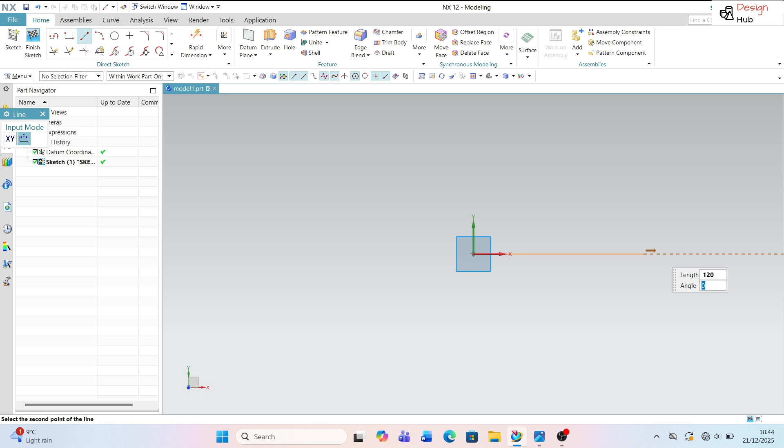The height is 20 mm. Again going with the line command.

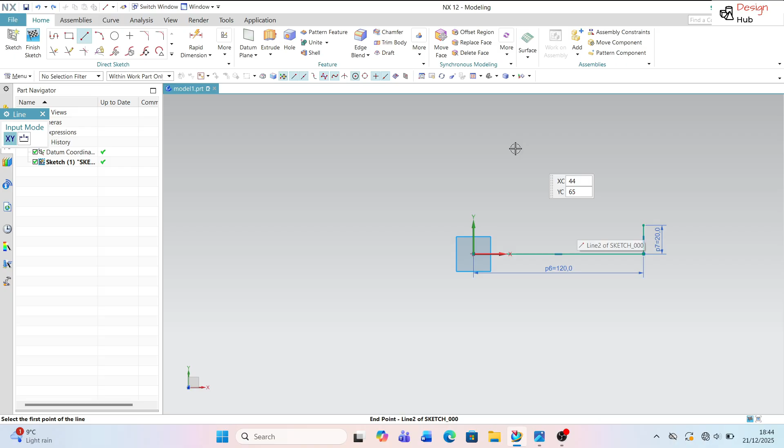This distance is 30 because 120 minus 60, so both sides are 30 mm. So again the 30 mm length, and angle is 180 because 180, since there is a minus side.

Now again the line command, and the distance is 25. This is the remaining, because total is 45 minus 20, so there is a 25 length.

And there's another line. It's 5 mm, you can see nearby the V slot.

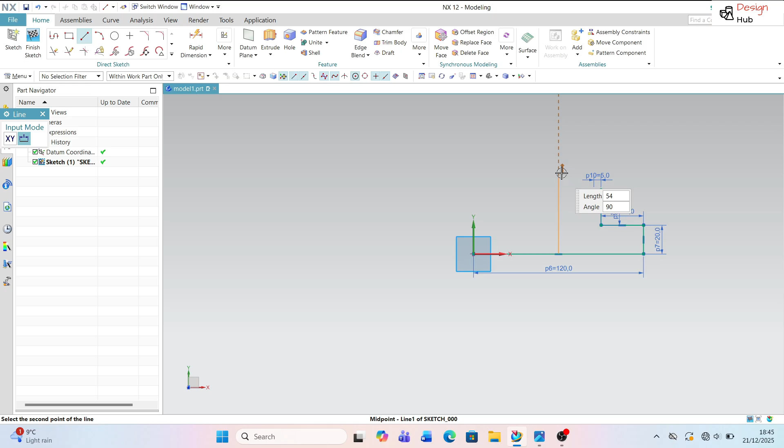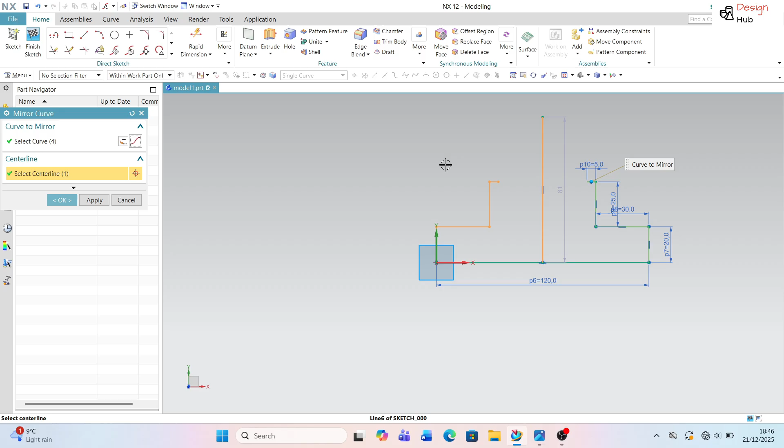Now we are going to mirror the sketch. First of all, sketch the line or the center line, and now we are going to choose the mirror curve. Select the line, select the center line. You can see the result.

Now we are going to make a V slot.

So create the center line and simply select the line, and we connected two lines. You can see on the 45 degree.

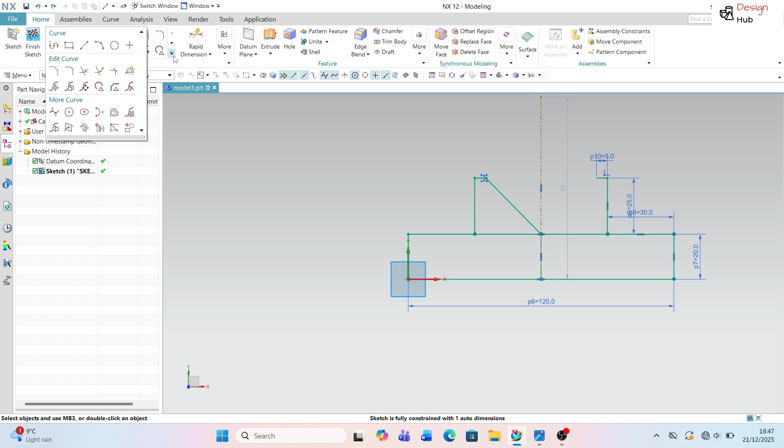Now again we are going to choose mirror curve, select the line and select the center line.

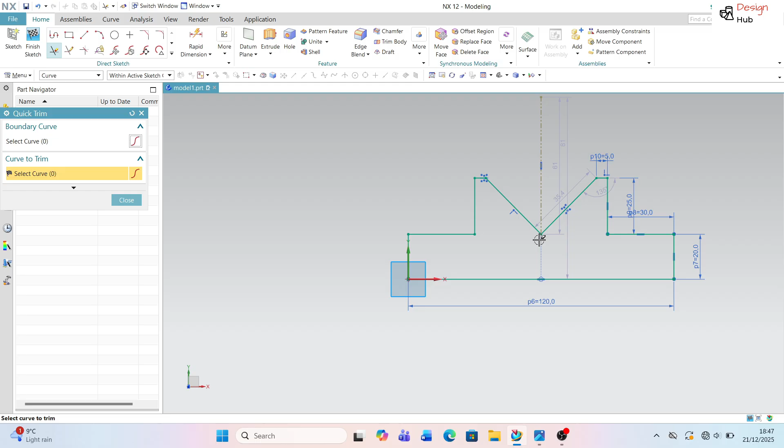You can see the V slot is ready, and now trim command to cut unwanted lines. You can see our sketch is ready for extrude.

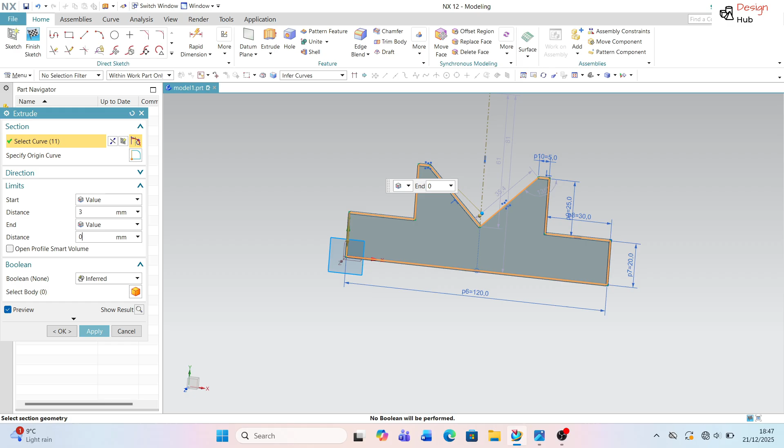Now you can see the width is 45. So now choose extrude command. The width is 45, and apply.

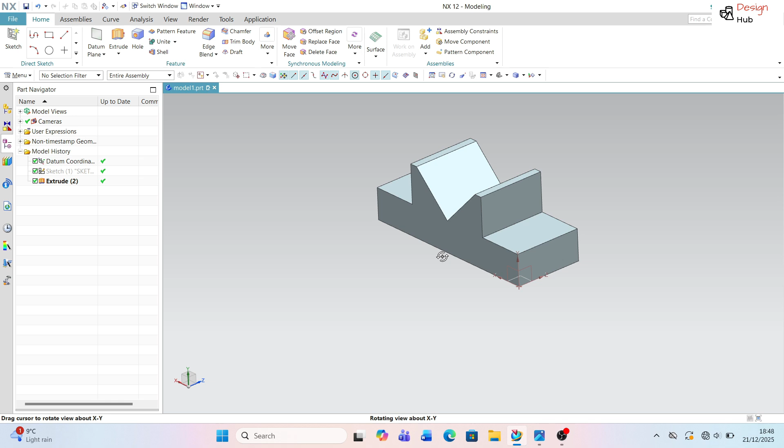You can see the extrude command is ready, and the job is also ready, and hide the unwanted lines. You can see our 3D modeling object is ready.